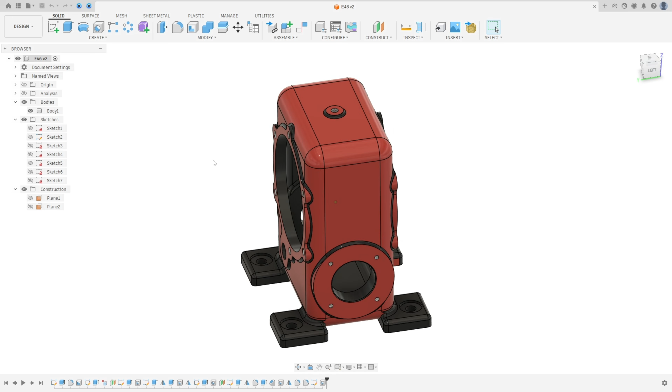Let's make one more tutorial in Autodesk Fusion. In this video you learn how to make this housing and you learn to use the extrude, fillet, shell, mirror, delete, offset plane and chamfer. So open Fusion and let's go.

The first step to create this part, we will make the main box here. Okay, so we will select the top plane and make a rectangle. And the distance between these two edges will be 180 minus 6. It will be 174. And the distance here will be 116 minus 6, 110 millimeters, okay? In the edge here, we have a fillet with 20 millimeters of radius.

So let's create this. Go to create a sketch and select the top plane. Select the 2-point rectangle, center rectangle, 110 millimeters by 174. Select the fillet, make a fillet here with 20 millimeters. Press OK, finish the sketch.

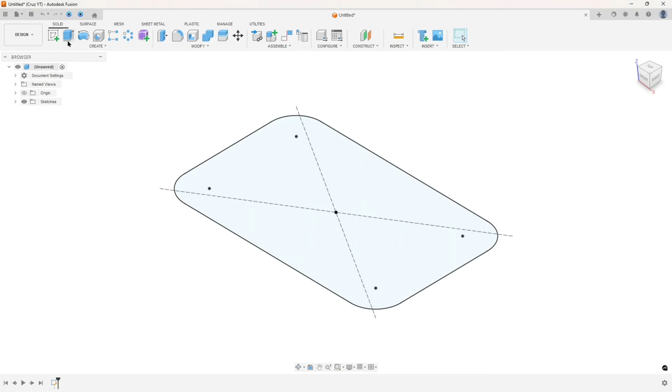Now we need to extrude this. So we will extrude this 253 millimeters minus 3 and minus 3 millimeters, okay? So go to extrude, select this profile, 253 minus 6 and press OK.

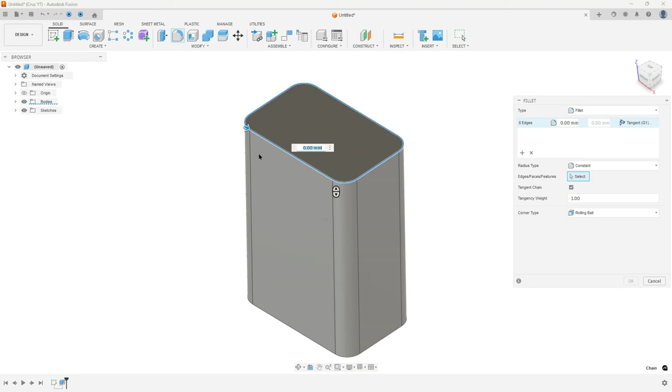Now we'll make this fillet here and the top edge here, fillet with 20 millimeters. So go to modify, select the fillet, select this edge and this edge here, 20 millimeters, press OK. We made this, okay?

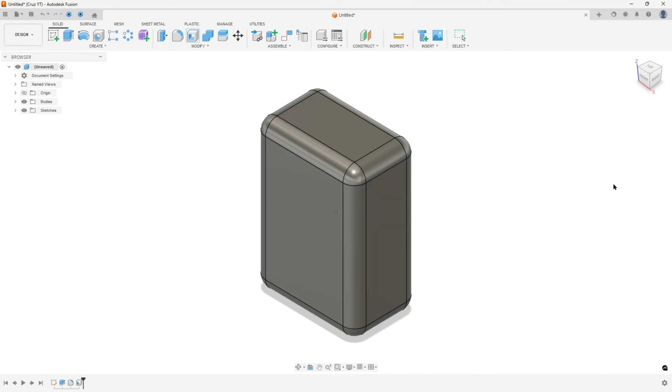Now we will define the internal thickness with 10 millimeters, okay? So go to modify, select the shell, select this body. The inside thickness here is 10 millimeters, press OK. Go to inspect, select section analysis, select the front plane here, flip the direction. We made this, okay? Hide the analysis.

Now we will create the feet here. To create this, it is a square here, 60 by 60 millimeters, okay? And in the corners we have a fillet with 5 millimeters of radius. And the distance between this edge and the midpoint is 204 over 2. And the distance here is 190 over 2, okay? We need to create this.

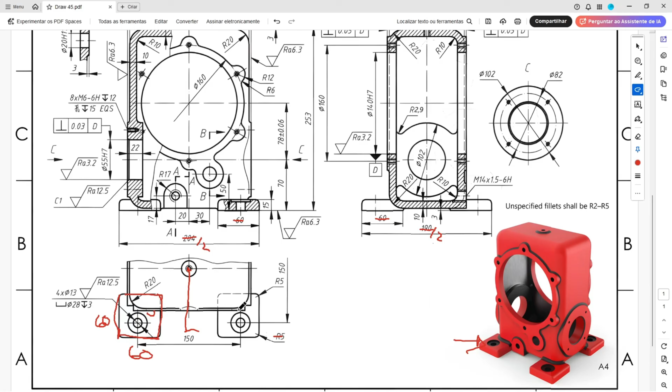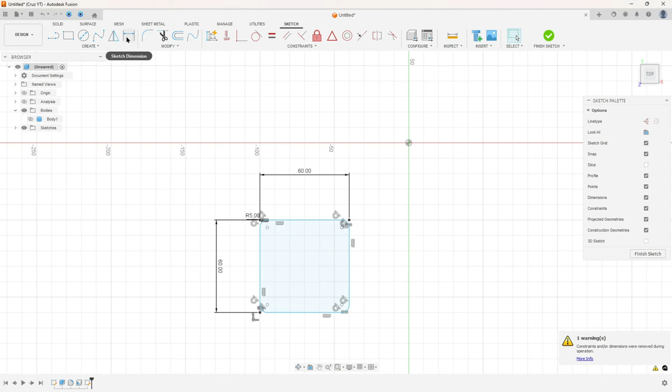So go to create a sketch and select the top plane. Select the 2-point rectangle, make a square here 60 by 60 millimeters. Go to modify, select fillet, 5 millimeters. Press OK. Now go to sketch dimension. The distance here is 102 millimeters. And the distance here is 95 millimeters.

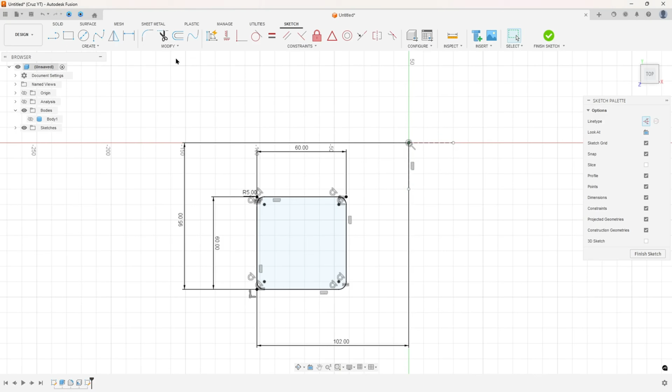Okay. Now select line, construction line type, make a construction line here. And make a construction line here. Go to create, select mirror, select this square. The mirror line, select this one, press OK. Now select both squares, go to mirror again. And the mirror line is this one. And press OK. Finish the sketch.

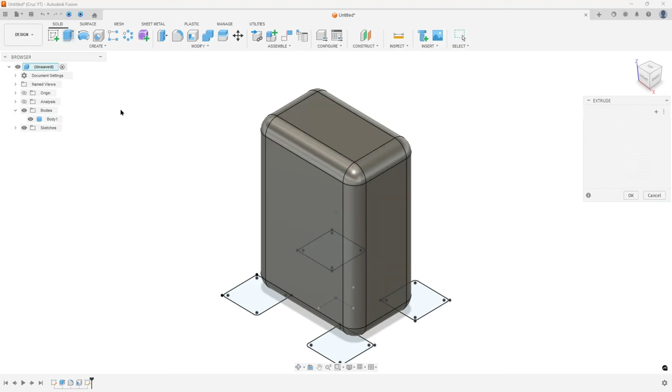We need to extrude this. And we will extrude this 15 millimeters. Here it will be 12 millimeters to this side, and 3 millimeters here, okay? So go to extrude, select all these squares. And the direction, select two sides. The distance 1, 12 millimeters, and the distance 2, 3 millimeters. Operation join, press OK.

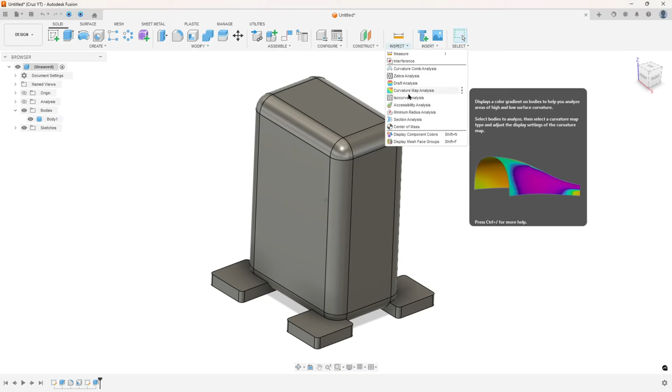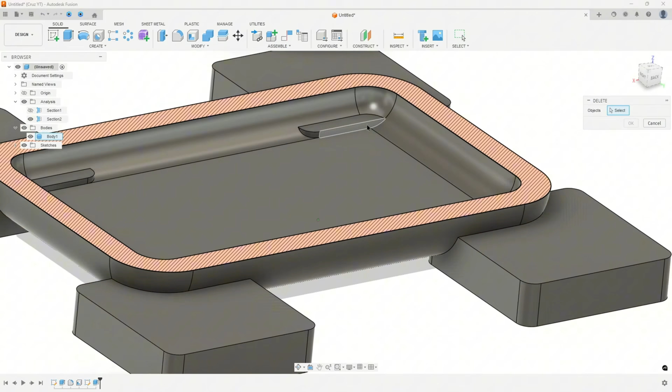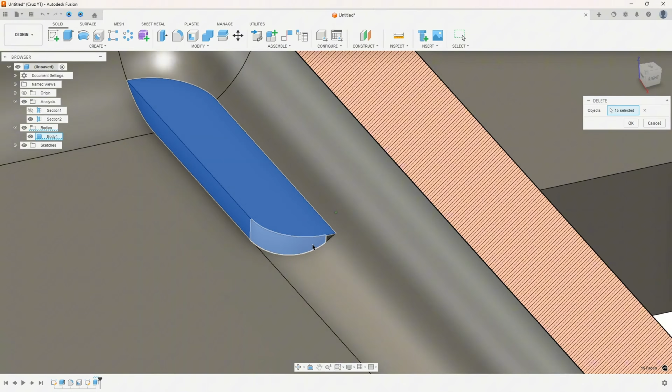Now go to inspect and select section analysis, and here select the top plane and the distance here 20 millimeters, press OK. I will show the analysis here, okay? Look that we have this face inside, so we need to delete this. So go to modify, select delete, select this face here, and this face, and this face, and this face here. And press OK. We made this, okay? Hide the analysis.

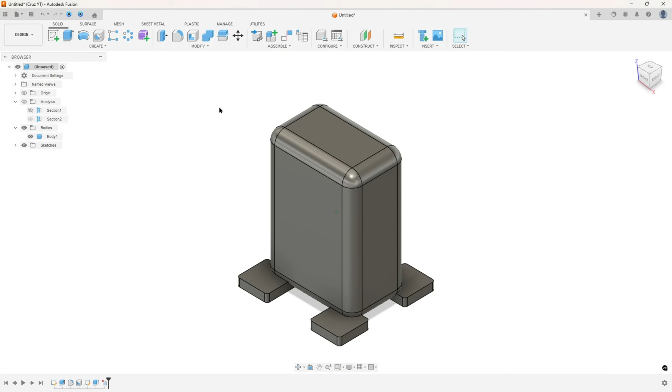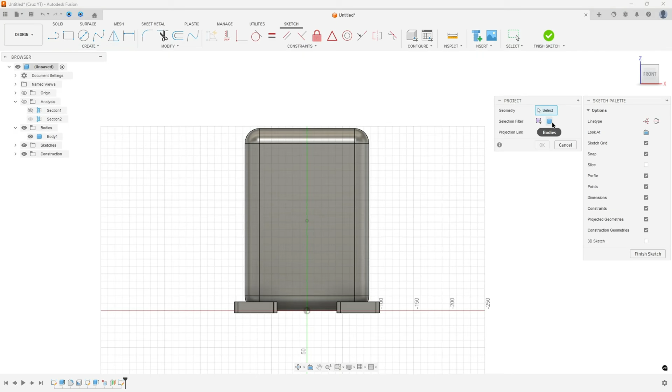Now we will create this sketch here. So we will create a new plane with 3 millimeters of distance from the front face, okay? So go to construct, select offset plane, select this face, 3 millimeters, press OK. Go to create a sketch and select this new plane. Go to create and select project, the selection filter body, select this body here, press OK. I will hide this body a little bit.

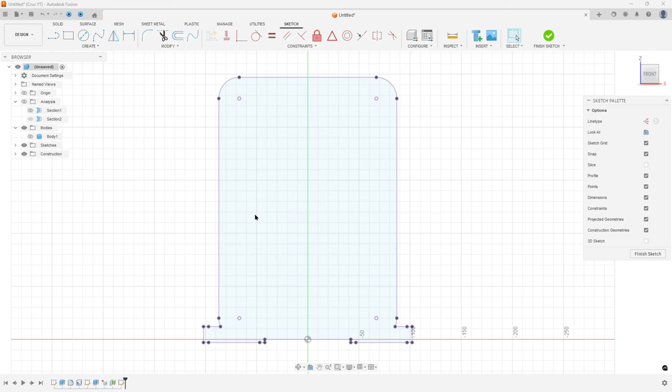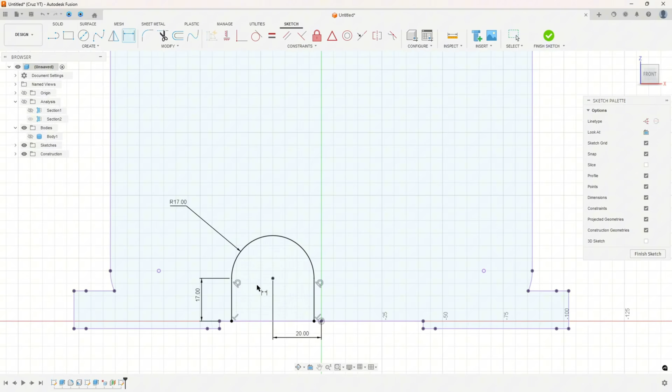And here in this sketch, we have the distance between the center of the circle and the midpoint, 20 millimeters, and the distance between this point and this edge, 17 millimeters. We have an arc here with 17 millimeters of radius. So let's create this. Select line, make a line here, 17 millimeters. Make an arc here and another line. Go to sketch dimension. The distance between this point and the midpoint here is 20 millimeters. And the radius here is 17 millimeters. We have this profile, finish the sketch.

Show the body one. Go to extrude, select this profile. The extent type, select to object. And the object, select this fillet here. The extend, select to adjacent face, operation join, and press OK. We made this.

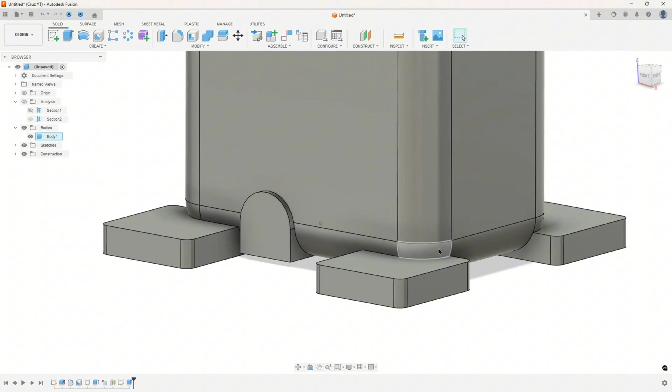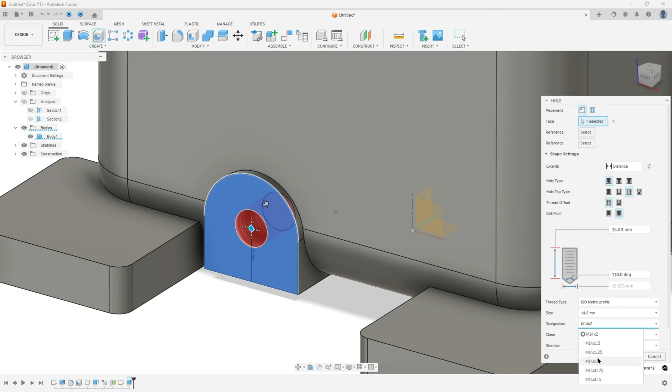Now we need to create this hole here. This hole is M14 x 1.5. So go to hole, select this face and select this arc here. The extent type is simple. The hole tap, select tapped. And the size here, 14 millimeters. The designation M14 x 1.5 and 15 millimeters. Press OK. We made this, okay?

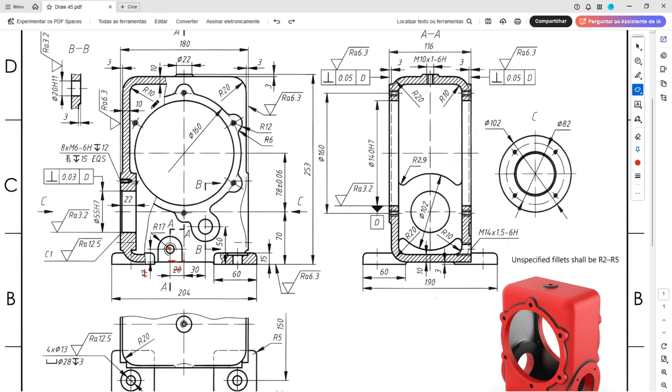Now we will use the same plane, but here we'll make this sketch here, okay? The first thing that we make, we'll create this circle here with 140 millimeters of diameter, and this one with 160 millimeters. And the distance between the center of this circle and the bottom face here is 70 plus 78 millimeters, okay? So go to create a sketch, show the plane one here.

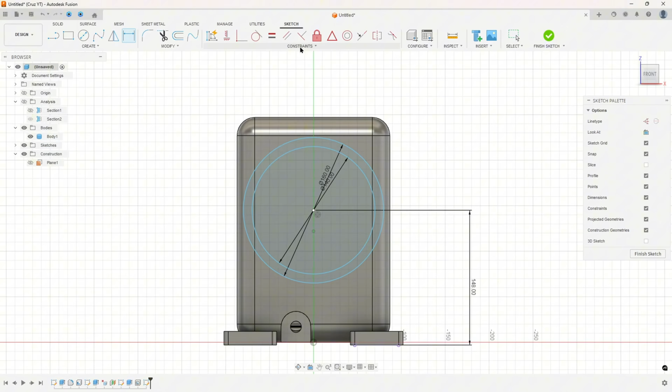Select a circle. Make a circle here 160, another one with 140. Go to sketch dimension. The distance between this point and the bottom face here is 148. And go to constraint, select horizontal vertical, select this point and the midpoint, okay?

Now we need to create this arc here. This arc has 12 millimeters of radius, and we have a fillet here with 6 millimeters of radius, and we need to create 6. Okay? So go to create, select a circle, make a circle here with 24 millimeters of diameter.

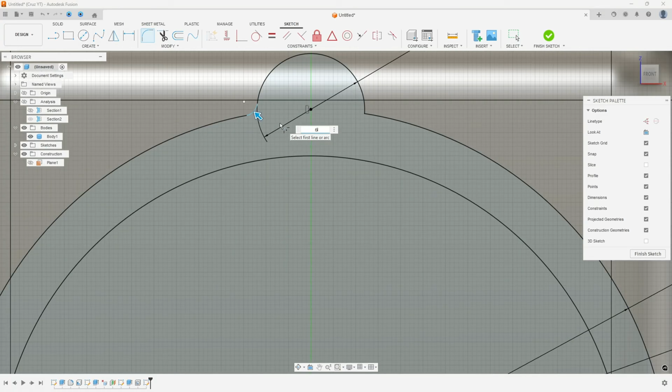And go to constraint, select horizontal vertical, select this point and this point here, select the trim, cut here and cut here. Okay, go to fillet, the fillet here 6 millimeters and the fillet here 6 millimeters. Press OK.

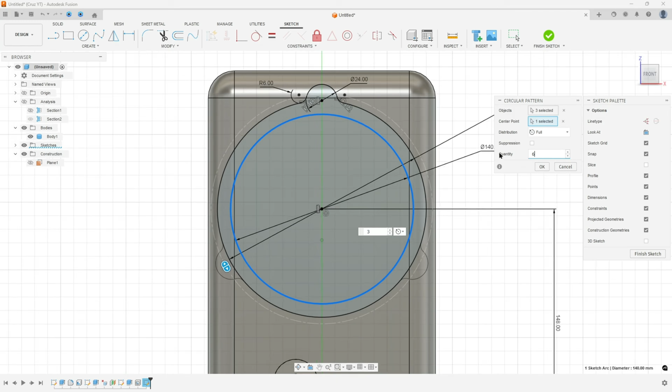Now go to create and select the circular pattern, select these two fillets and this arc, the center point, select this circle, the distribution full and the quantity here 6. Press OK. Now go to modify and select the trim, cut it here. We made this, okay?

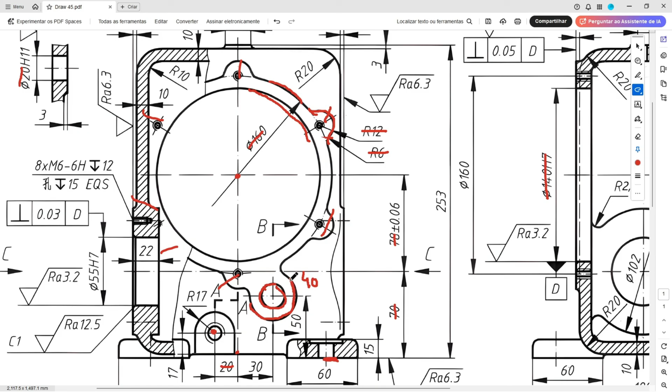Now we will create this circle here and this one. This circle has 20 millimeters of diameter and this one has 40 millimeters of diameter, okay? Because the distance here is 10 millimeters, so here 10 millimeters and 10 millimeters here, okay? And the distance between the center of the circle and the bottom face is 50 millimeters and the midpoint 30 millimeters, okay?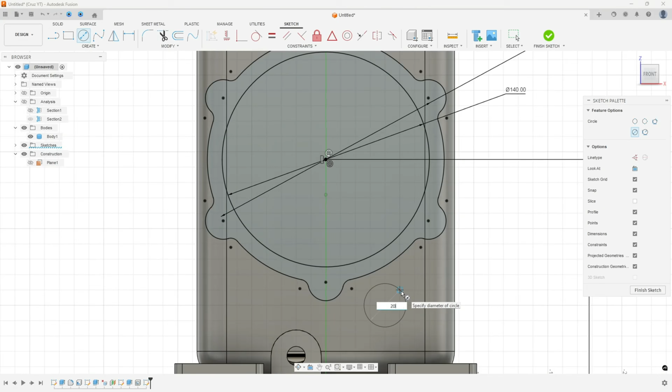So select the circle, make a circle with 20 millimeters and another one with 40 millimeters. Go to sketch dimension, the distance here 50 millimeters and the distance between this point and the midpoint here is 30 millimeters, okay?

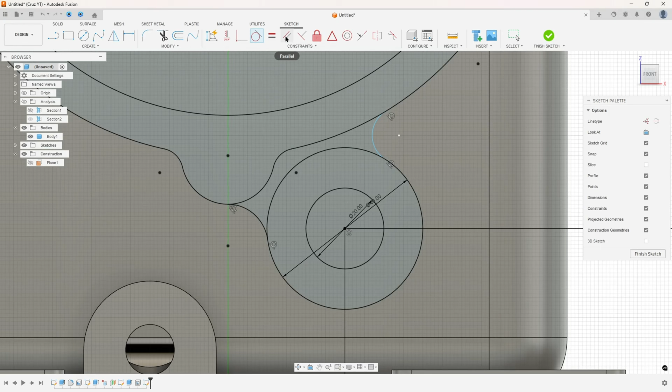And here we need to create an arc, tangent on both sides, okay? And here too, and this arc is equal. So go to create, select arc, 3-point arc, take this point here, the center of this arc, tangent, and tangent here, go to constraint, select the tangent, go to constraint, select the equal, select this arc and this one. Okay, we made this. Let me move the dimensions here.

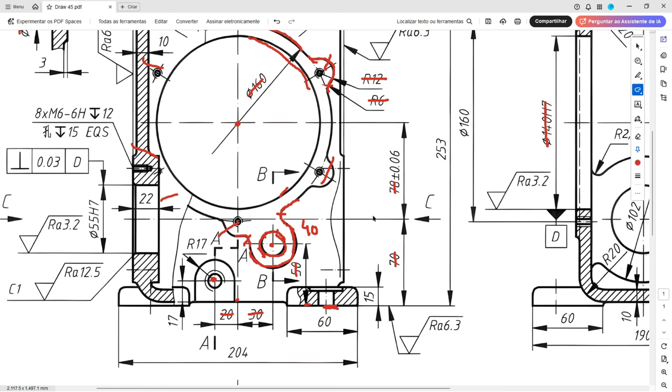Now we need to extrude this. So we will extrude this profile to the front face, okay? So finish the sketch, go to extrude, select the body one. The start here, profile plane, direction one side, the extent type to object. The object, select this fillet here.

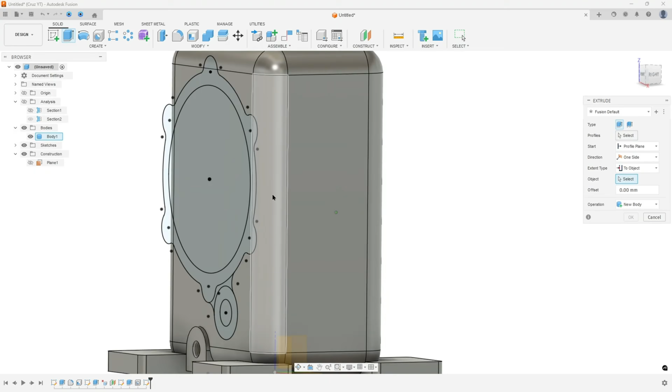Select the profile, select all this profile. The extent type to object, select this fillet. The extend, select to adjacent face. Operation new body, operation join, and press OK. We made this.

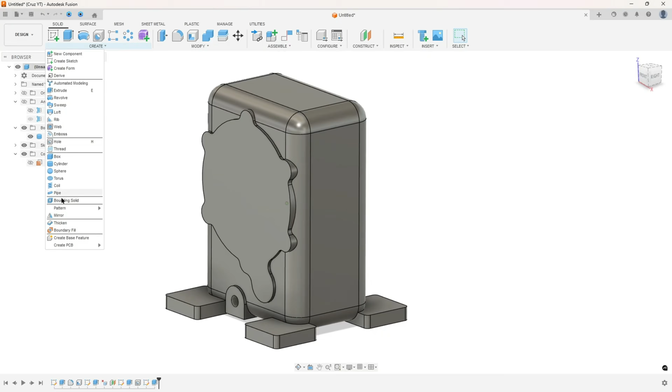Now go to create and select the mirror. The object type, select the features, the object, select this extrude, and the mirror plane, select the front plane. And the compute type, select identical, press OK. We made this, okay?

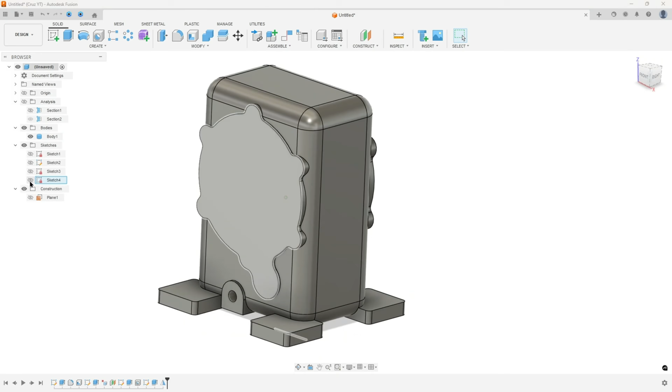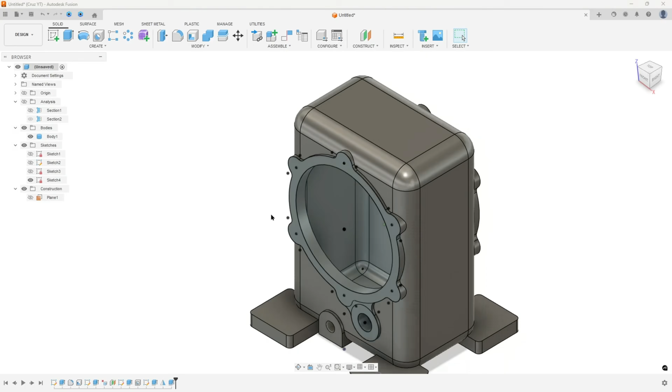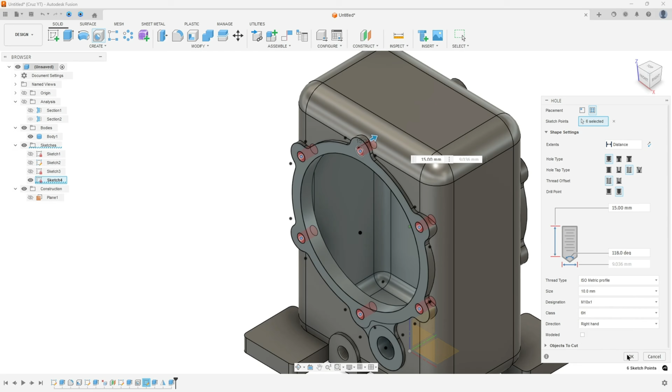So show the sketch 4. Go to hole, select this point here. The hole type, select simple, the hole tap type, tapped. And the section size here, select 10 millimeters. And the designation, M10x1. And press OK. Hide the sketch 4.

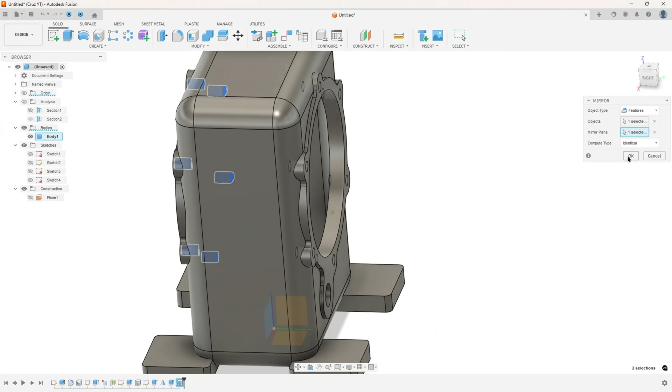And go to create, select mirror. The object, select this hole here. Make sure that the object type is features, okay? And the mirror plane, select the front plane. Compute identical, press OK. We made this, okay?

Now we will create this extrude here on the top face. We have a circle here in the center with 22 millimeters of diameter and a hole here with M10x1. So let's create this. We need to extrude this 3 millimeters, okay? So go to create a sketch, select this face, select this circle, 22 millimeters. Finish the sketch, go to extrude, select this profile, 3 millimeters here.

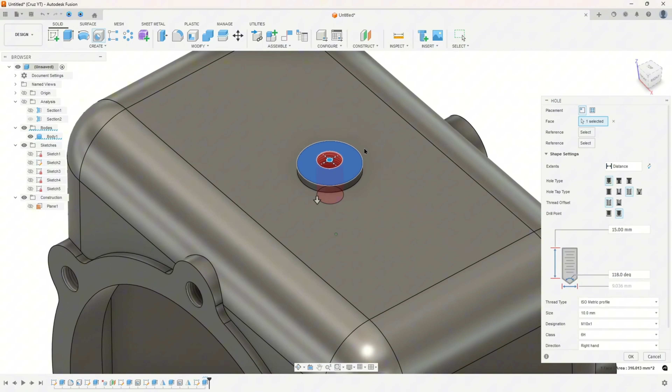Operation join, press OK. Now select the hole, select this face here and select this circle here, this edge to add the reference, okay? It's the same designation, press OK. We made this, okay?

Now we'll create a new plane, an offset plane from this face here with 3 millimeters of distance, okay? 3 millimeters here, sorry. And we will create this sketch here. And here you see the dimensions, okay? So we need to create a circle with 102 millimeters, 82 millimeters, and 55 millimeters, okay?

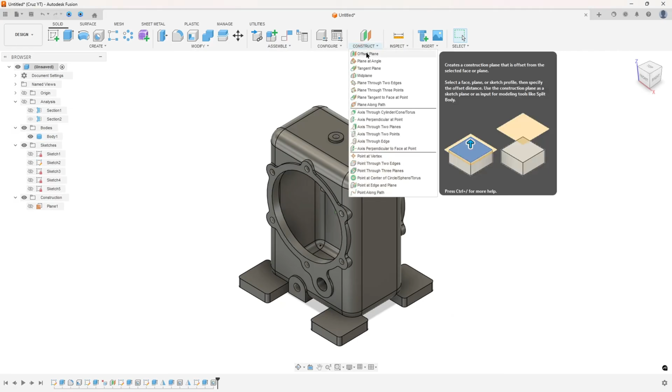So go to construct, offset plane, select this face, 3 millimeters, press OK. Go to create a sketch and select this face here. Select the circle, make a circle with 102 millimeters, another circle with 82 millimeters, and another circle with 55 millimeters.

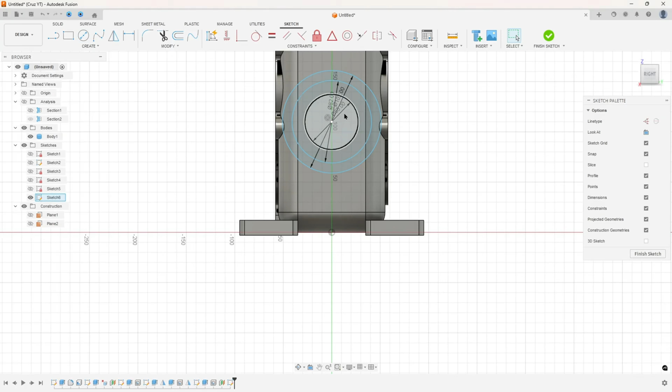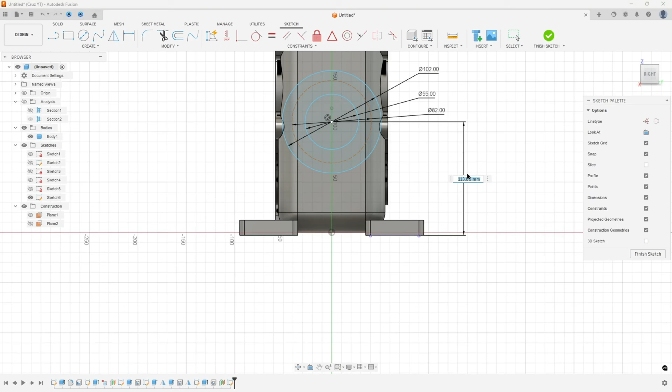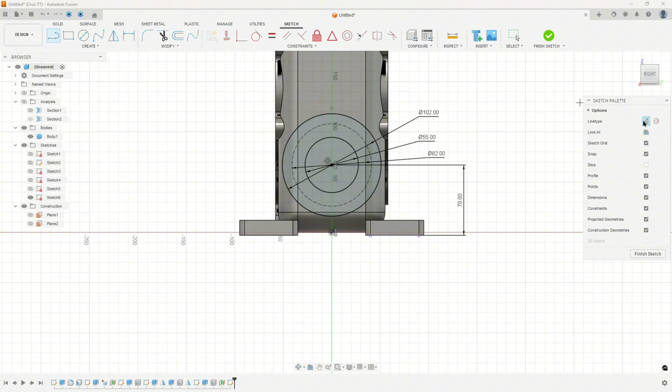To make this hole here. So we'll create a construction line here and another one here. The angle 45 degrees. And we needed to make 4 points here, okay? So select line, a construction line. Make a construction line here and make another one here. Go to sketch dimension. The angle 45 degrees. Sorry, I made 2 lines here.

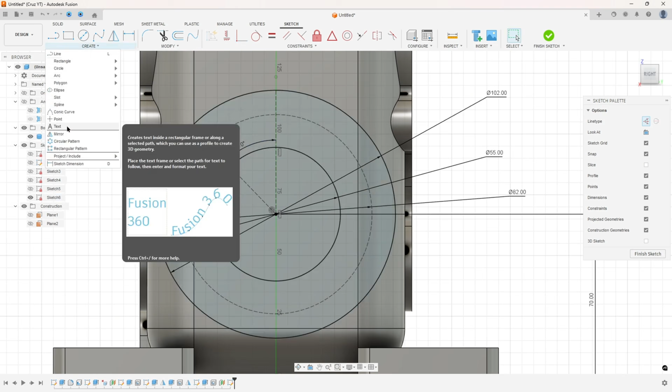Okay. And go to create and select the point. Make a point here. Now go to create again, select circular pattern, select this point, and the center point, select this circle. The quantity here, 4, distribution full, press OK. We made these 4 points, okay?

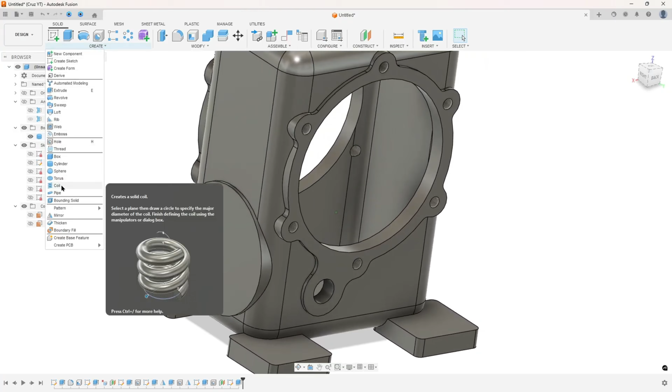Now finish this sketch. We needed to extrude this 22 millimeters. So go to extrude, select this profile, minus 22 millimeters to this direction, the operation join, and press OK. Now go to create and select the mirror. The object, select this one, and the mirror plane, select the right plane, okay? Identical, press OK. We made this.

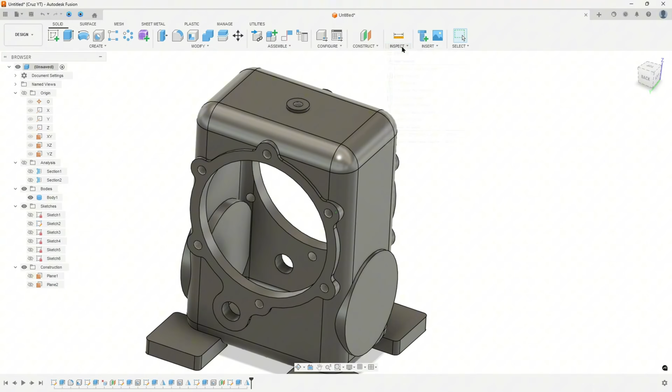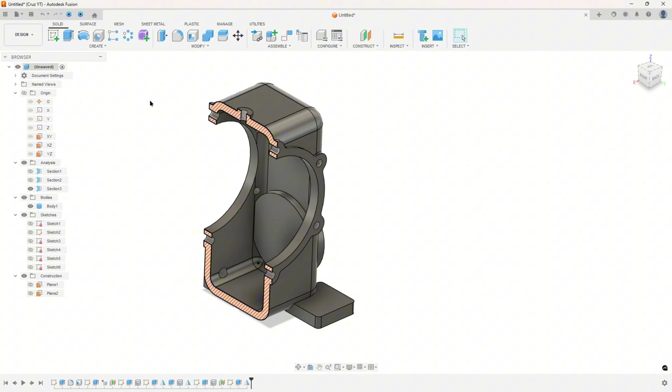Now we need to make a fillet here. Let me add a section analysis here. Select the right plane. Okay. So let me show the analysis. We needed to create a fillet here with 2.9 millimeters, okay? So go to modify, select the fillet, select this edge here, and this edge here, 2.9 millimeters. Press OK.

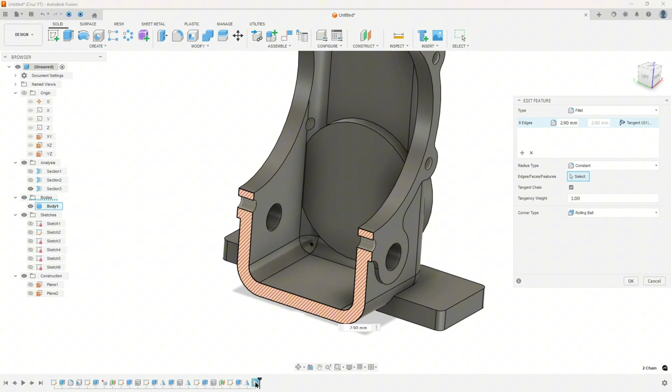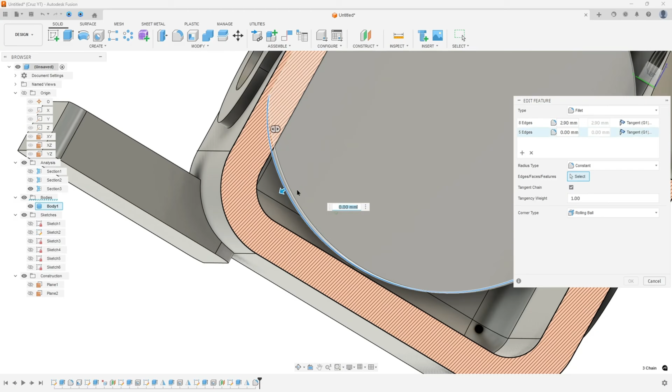Change the side of the analysis here and edit this fillet, add selection set, select this edge here and this edge here, 2.9 millimeters. Sorry, this one, I took a wrong one. Add selection set. I picked the wrong line, sorry, 2.9 millimeters. And press OK. I will hide this analysis. Look that we have a fillet here and on the other side, okay?

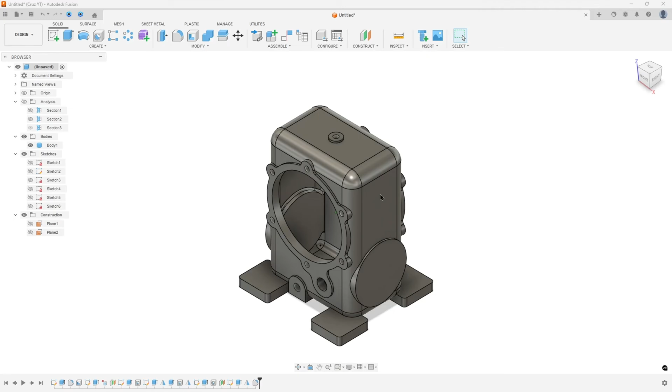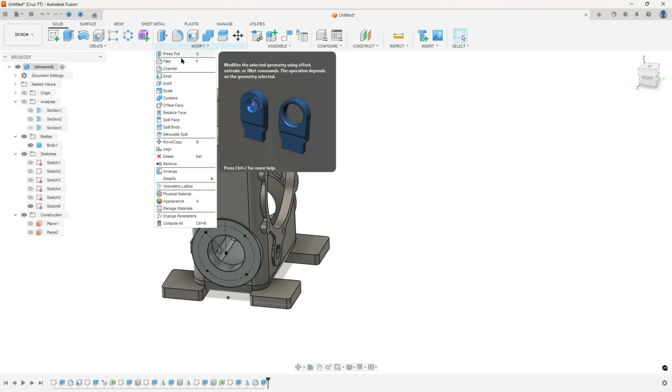Now we will create this hole here with 55 millimeters. So show the sketch 6, go to Extrude, select this circle here. The extent type, select all, operation cut, press OK. We made this cut here, okay? And let's create this chamfer here, a chamfer with 1 millimeter, C1. So go to modify, select the chamfer, select this edge here and this edge here, 1 millimeter, press OK.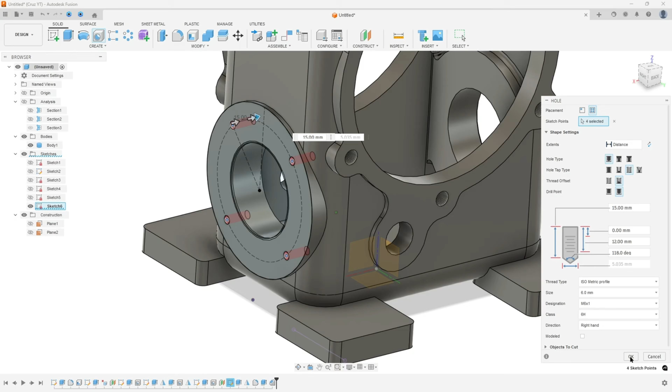And now let's create this hole here, okay? It is M6, the thread has 12 millimeters and the hole has 15 millimeters, okay? So select the hole and the placement, select from sketch, select this point, and the hole type, select simple, the hole tap type, tapped, the thread offset, select offset, and here the thread has 12 millimeters and the hole has 15 millimeters, okay? And designation here is M6, so select the size 6 millimeters, M6, and press OK. We made this, hide this sketch.

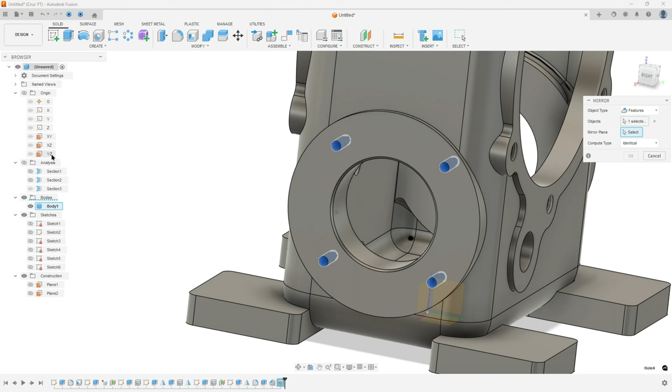Now go to create, select the mirror. The object type, select the features, select this hole here. The mirror plane, select the right plane. To make the same on the other side here and press OK. We made this, okay.

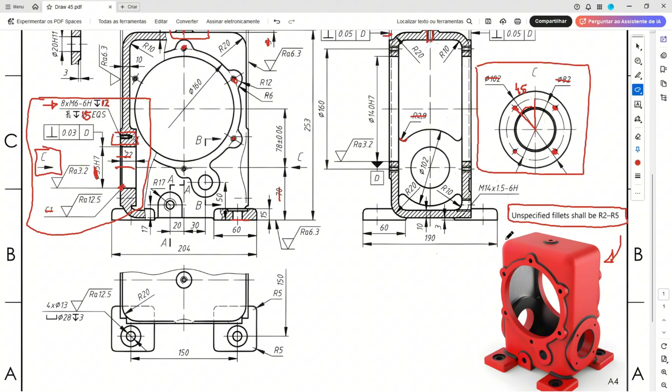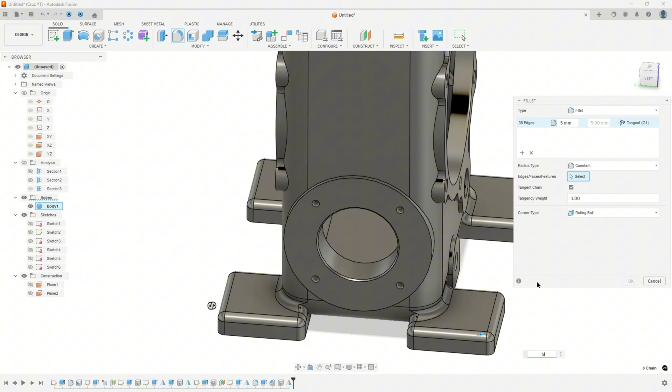Now to finish this sketch, we needed to add fillets. So the fillets can be from 2 millimeters to 5, okay. So go to fillet. Here I will select the 5 millimeters in the feet, okay. Okay, go to fillet again. Now select this edge here, this one, select this edge here, this edge here, this one.

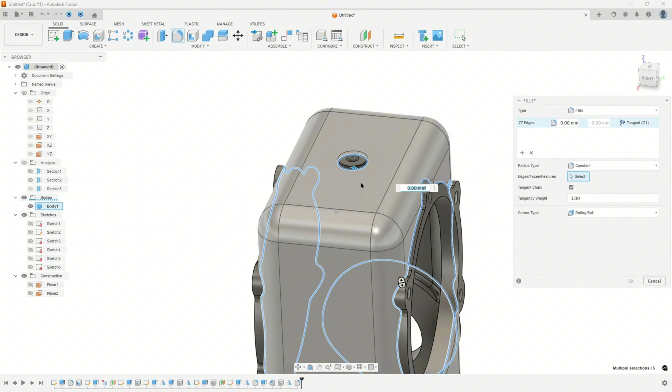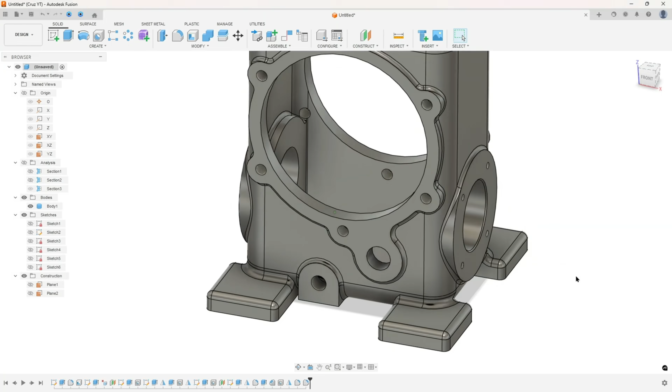Let me see if it is missing something. 2.9 millimeters, this fillet, okay? And press OK. I don't know if I forgot some fillet, but I think it is right. It's missing a fillet here. Let me edit this, add selection set, select this edge, 2.9 millimeters, press OK. And that's it. I will add some color here.

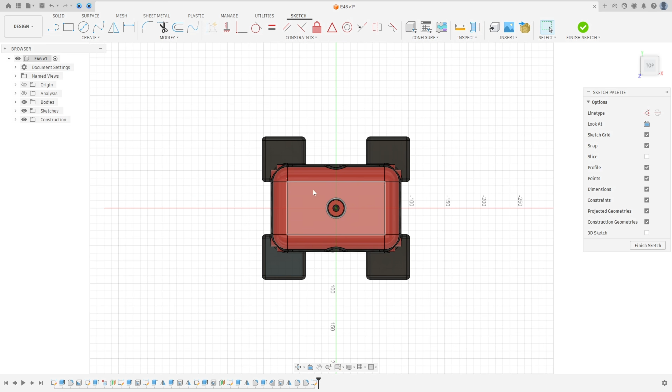And I forgot to create a hole here in the feet. So let's create this. The reference for the center of this hole is a square with 150 millimeters. And the center of this square will be in the midpoint, okay? And the dimensions of the hole are here. So let's create this. The first thing here, go to create sketch and select this face, and select center rectangle, and activate the construction line type. Click here on the midpoint. Make a square here, 150 millimeters, and press OK. We made this square here.

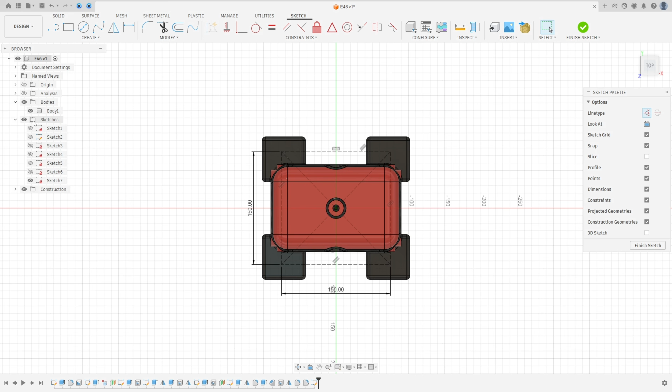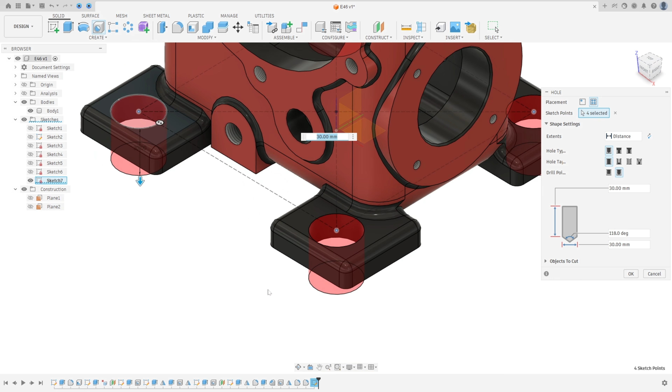And finish the sketch. And now go to Hole and the placement. Select from sketch, and here we will select this edge here, this edge here, this edge, and this one. And the dimensions of this hole. We have a cut with 28 millimeters of diameter and 3 millimeters of depth, and the center hole has 13 millimeters of diameter.

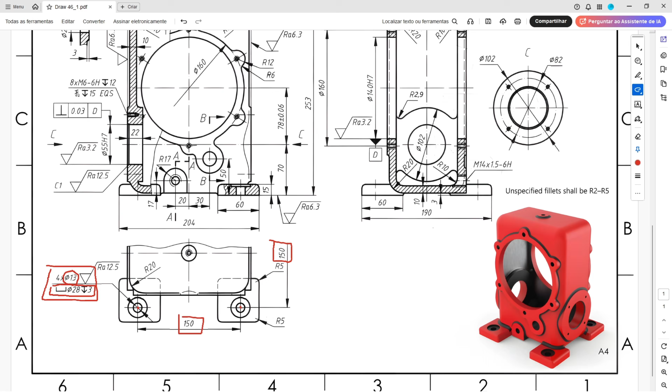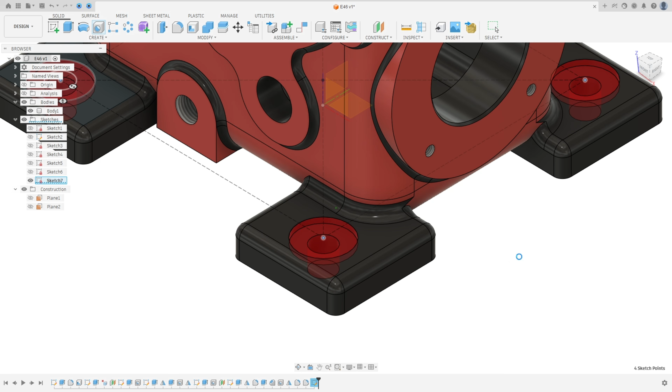So the extent here, select all, the hole type, select counterbore, and the hole tap type simple, and the counterbore diameter is 28, and the counterbore depth is 3 millimeters, and the hole is 13 millimeters, and press OK. So that's it. So here we finish our exercise.